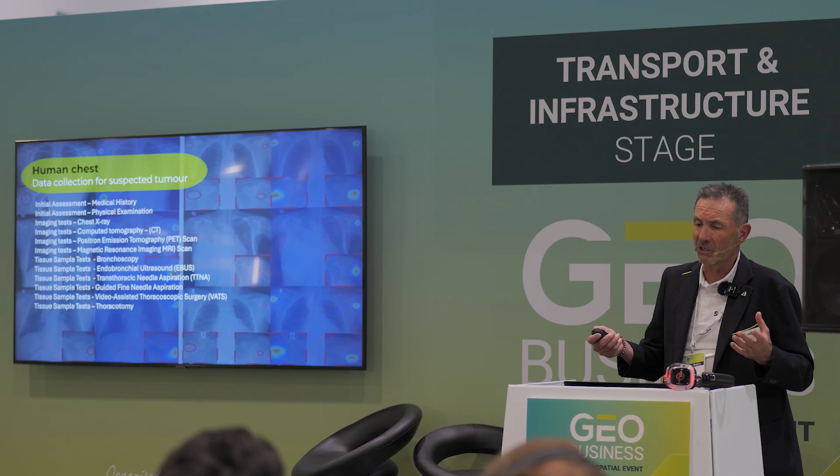The range of early assessment approaches they might take, the portfolio of imaging techniques they've got to hand, the ability they've got to take samples and conduct tests on those samples, and the ability to do laboratory tests, effectively in-situ tests and laboratory tests.

So there's a massive range of data that they may be looking at in order to diagnose a patient, to understand the nature or the extent of a problem, and to facilitate a remediation, a repair, a healing in their case.

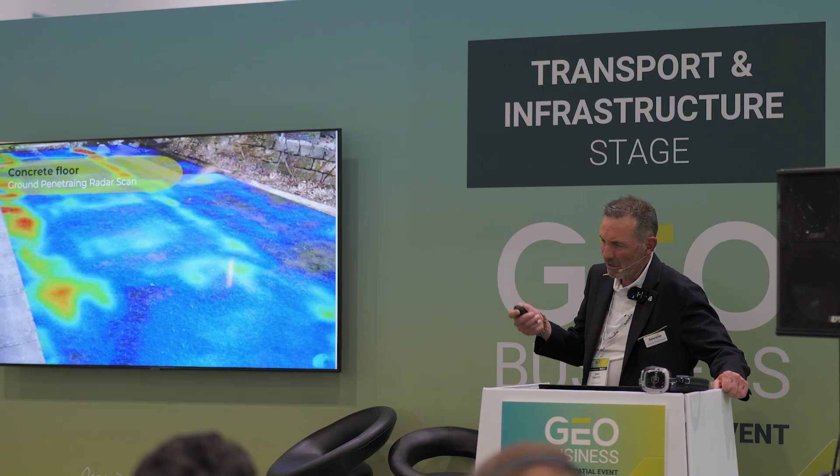Fortunately, I've never had reason to get that close to that area of science, but I have spent what seems to be quite a long career, a lifetime really, working in fields, gathering data about the condition of structures. For a long time, I was responsible for a structural investigation team.

I was director of a company involved in non-destructive testing. We would get asked frequently to look at a structure like a concrete floor, in this case. We might do a ground penetrating radar survey of it. But we'd also do a bunch of other things.

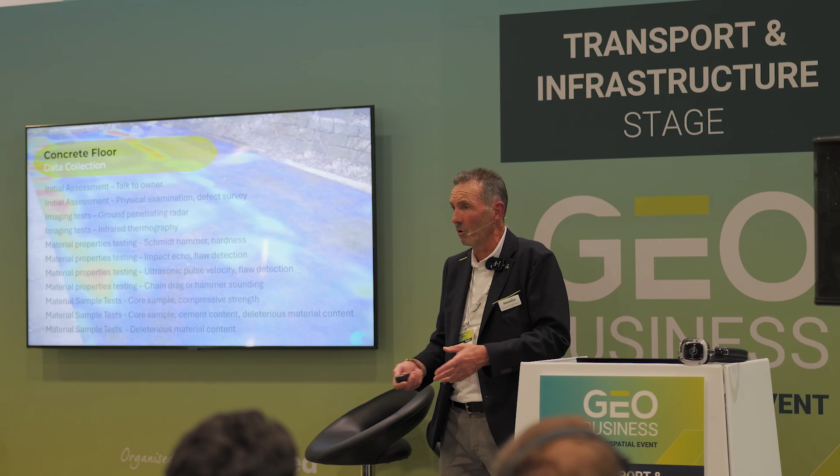We would ask what was the nature of the problem, and try to understand what anecdotal evidence was available. We would use a range of imaging techniques, take samples, look at material properties, both in situ and in a laboratory. We would always try to take a balanced view towards arriving at something affordable and practical, resulting in a report that would help the professional make a decision.

So I've moved on from that area. Five years ago, I joined Senceive, and I moved from a world where I was taking data from the here and now, from one position in space at one point in time, about the state of this floor here and now, to one where I'm much more involved with longer-term monitoring, providing longer-term insight into how a structure might be behaving.

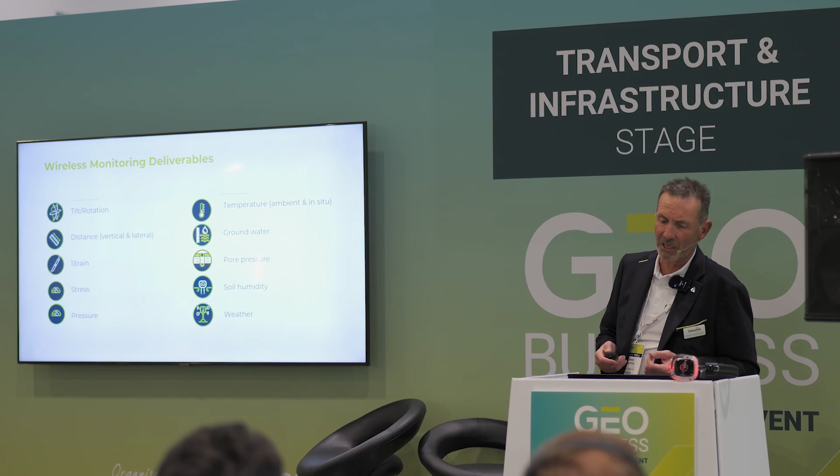I think a lot of those same principles apply. Again, there's a whole range of different parameters that we can gather, that we can choose from, and putting the right balance of those together as an expert in the field is very much the job of the professional monitoring specialist, I think. So I want to spend a little bit of time looking at some examples of how that comes together.

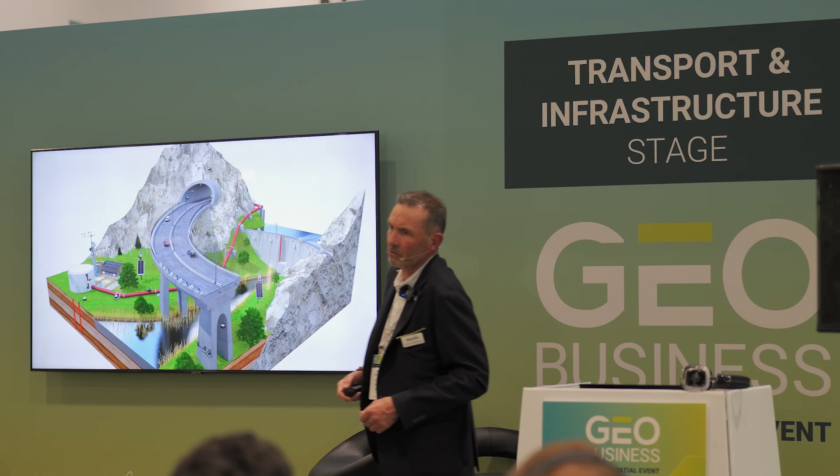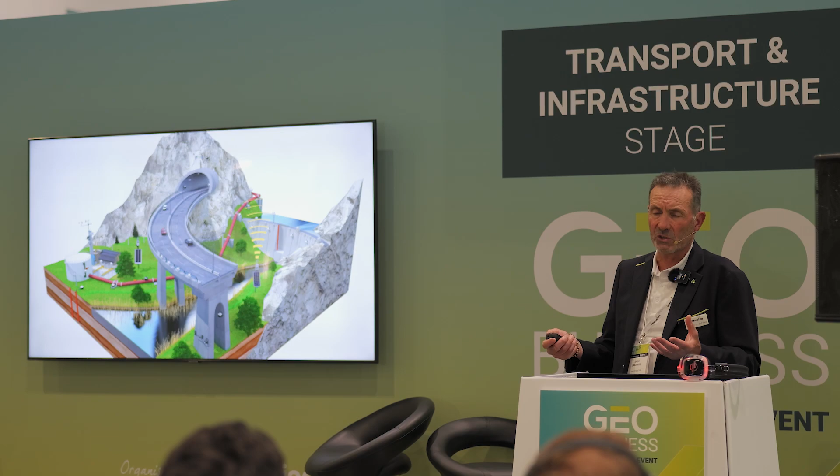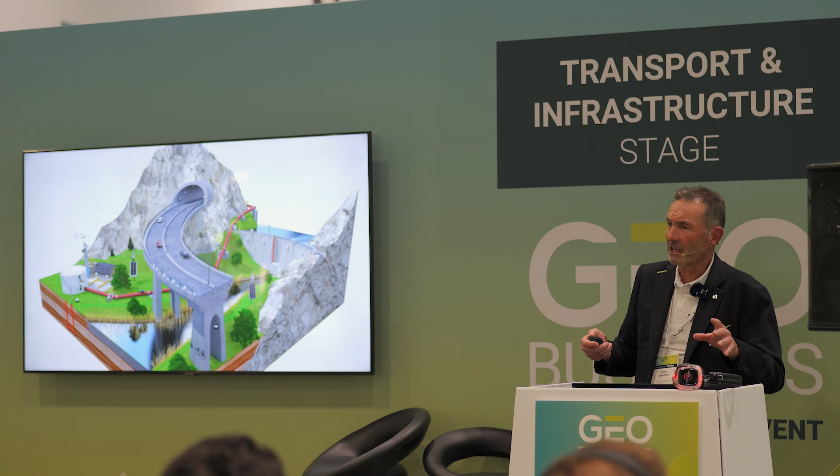All of these things forward data from the sensor to a cellular gateway, which relays that data to a cloud-based server, allowing you as a remote user to access it. They can send automated alerts if thresholds are breached and collect long, medium, or short-term data. A range of different sensors can be applied over these timeframes, collecting virtually continuous data on a virtually permanent basis from the structure.

In the limited time we've got today, I want to focus on a couple of areas. The first is an example of a structural monitoring project: a bridge in Dortmund, Germany, involving a multi-sensor monitoring approach to look at a structure that was highlighted to be of interest.

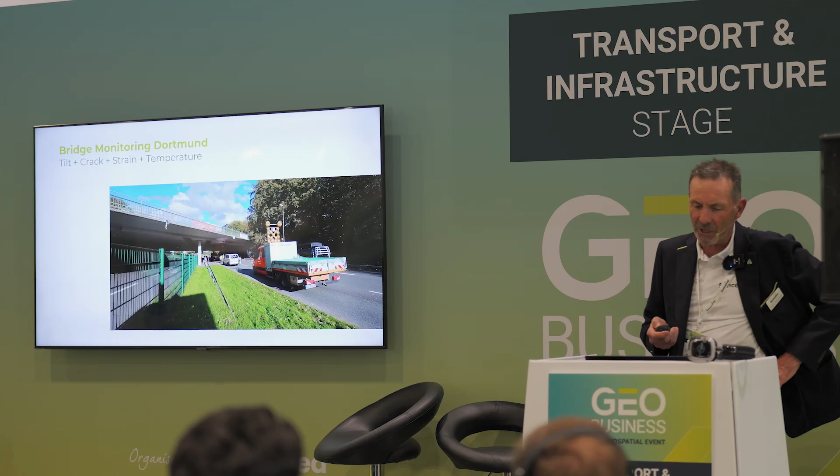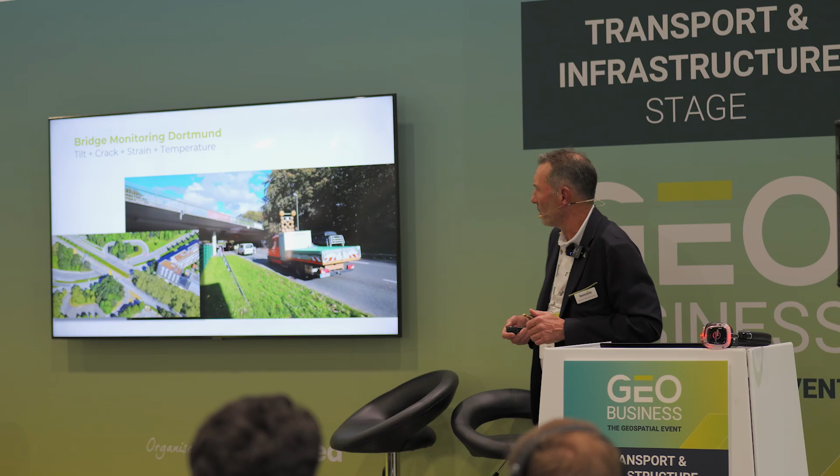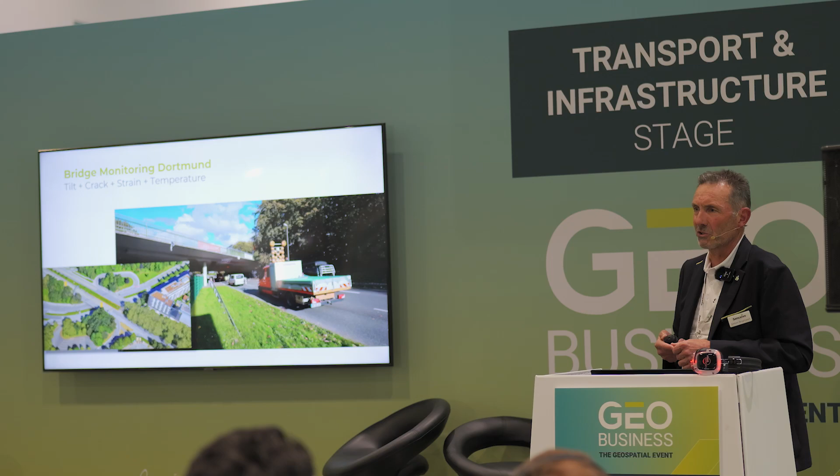This is probably not the most exciting bridge in Germany, or even in Dortmund, but it's quite important because it's a 6-lane bridge carrying an arterial road, effectively the inner city ring road in Dortmund, over another busy local road. It was built in 1957 and is a key part of the inner Dortmund road network. It's also quite close to Dortmund's football stadium, so a lot of people would be upset if it was out of service.

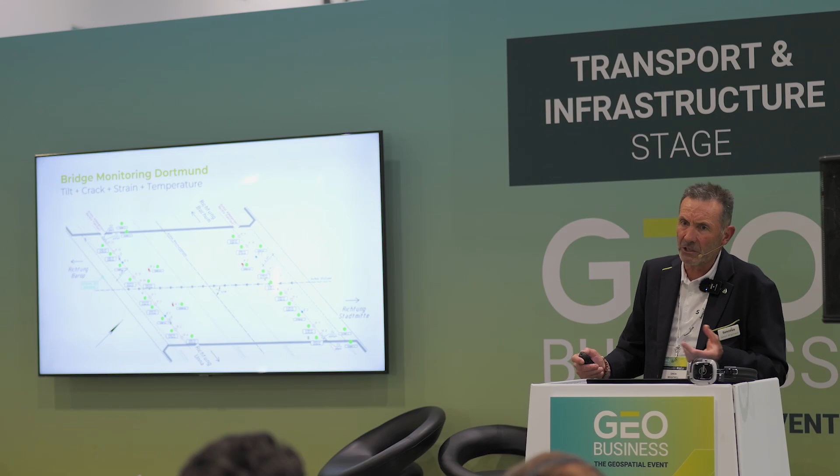A condition survey was carried out in 2022, showing evidence of surface cracking and distress. It's quite an old structure now, it's had a lot of use, it's exceeded its design life and is carrying excess loading - a familiar story across bridges worldwide. There was concern about a loss of pre-stressing in the concrete deck, and possible internal corrosion of the steel, potentially weakening the structure.

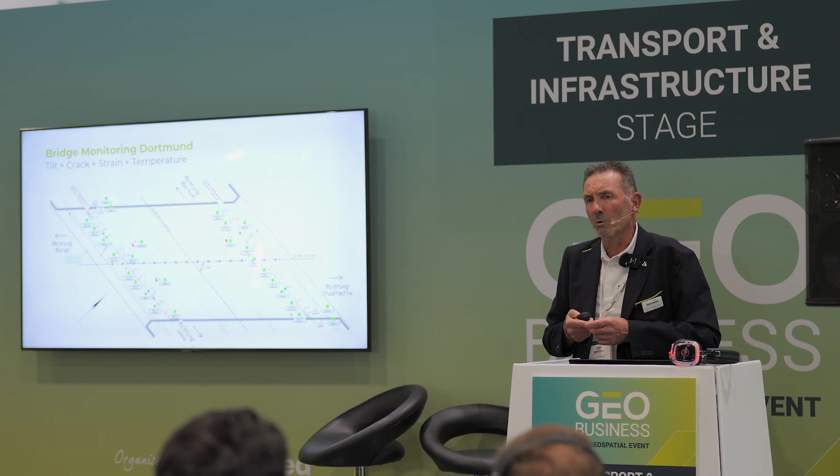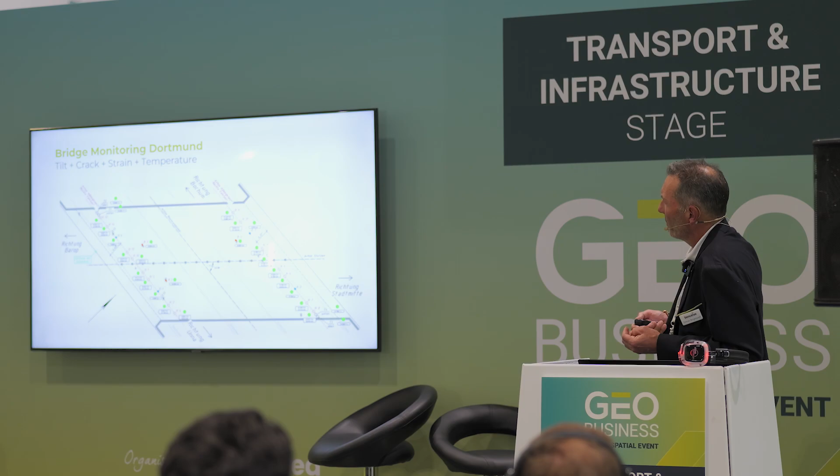The engineers responsible particularly wanted to know how the bridge behaved under load, how it was deflecting. A monitoring package was put together, starting with installing a series of tilt nodes on the deck soffit in two lines - lots of these were effectively stuck to the underneath of the bridge. If we move on, we can see that happening.

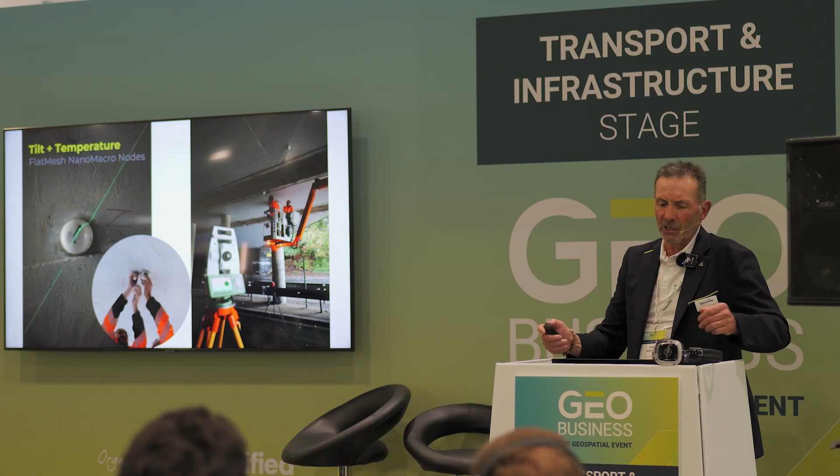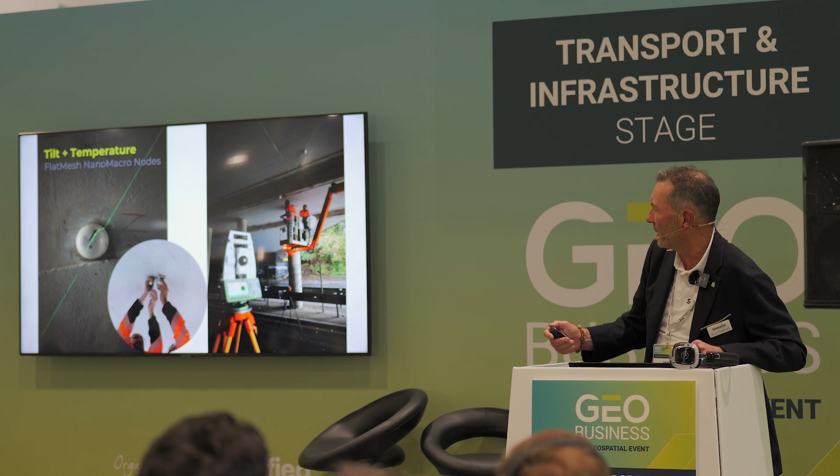These sensors, in this case, just drilled into the deck soffit, into the concrete. This is pretty simple stuff - it doesn't require a high degree of specialism and can be done quickly and simply, in this case just during a relatively short road closure with access to a hydraulic access platform.

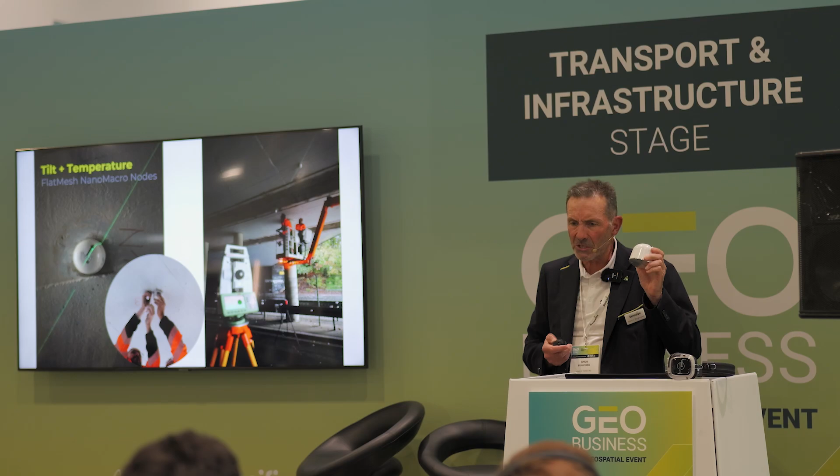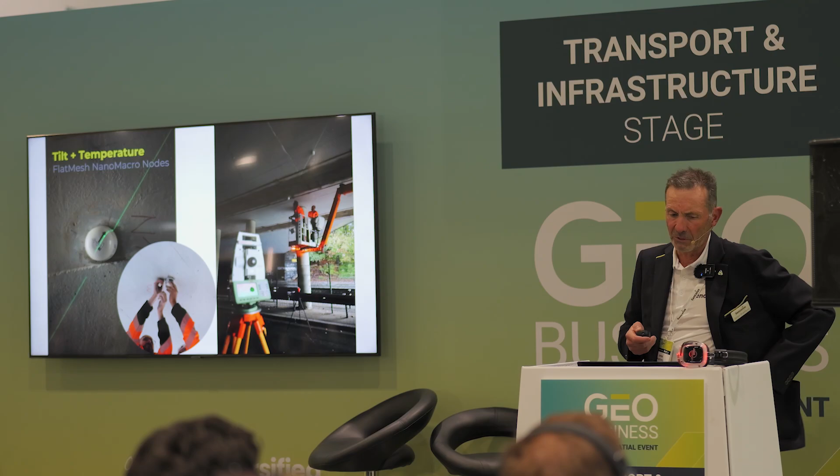These sensors do a range of different things. First, they measure rotation - they're triaxial tilt sensors, measuring rotation to within a thousandth of a degree, very precise measurements. They also measure temperature, so it's possible to understand effects like diurnal changes, whether sun hitting the bridge structure is having an effect, allowing temperature compensation on the data. They communicate in a mesh network via a gateway so you can see the data without visiting site.

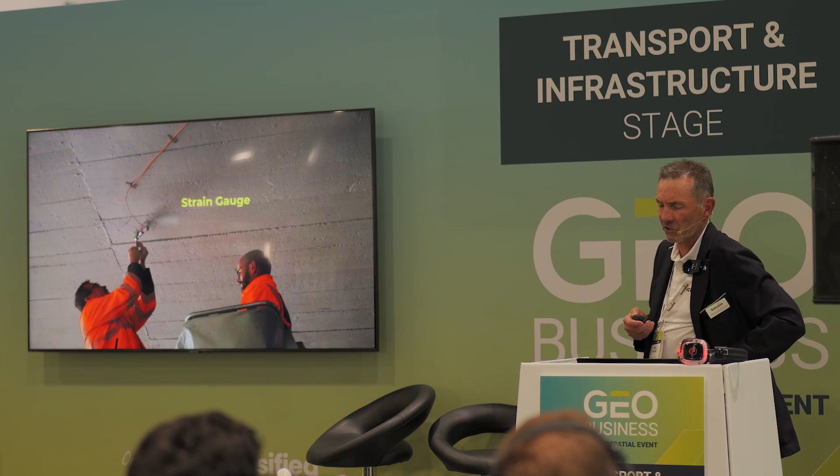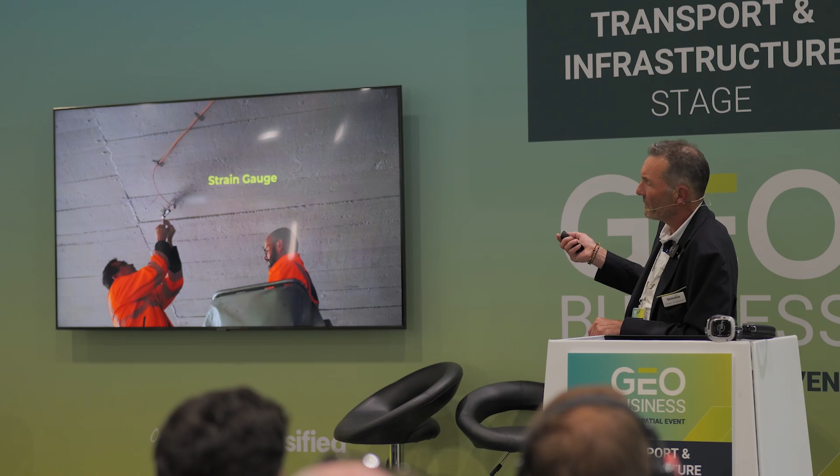A number of other sensors were installed within the same wireless network, all harvesting data to remote users in the same way. At mid-span on both sides of the deck, strain gauges were installed so the effective loading could be assessed. Where there were cracks on the deck, crack sensors were installed, enabling us to look over time - a day, a week, a year - at how those cracks were changing in extent.

Those sensors were all installed at the start of a 6-month monitoring program. They were installed and left sampling at 30-minute intervals for six months to build up a baseline data set. After that period, there was another road closure and another batch of data was collected, including using laser scanners to look at the behavior of the bridge structure.

The reason that was done at that stage was exciting - our friends at Dortmund Council pulled some strings and got the fire brigade to lend them the biggest truck they could find, a 48-ton crane, which could be used to provide this dynamic load on top of the bridge deck.

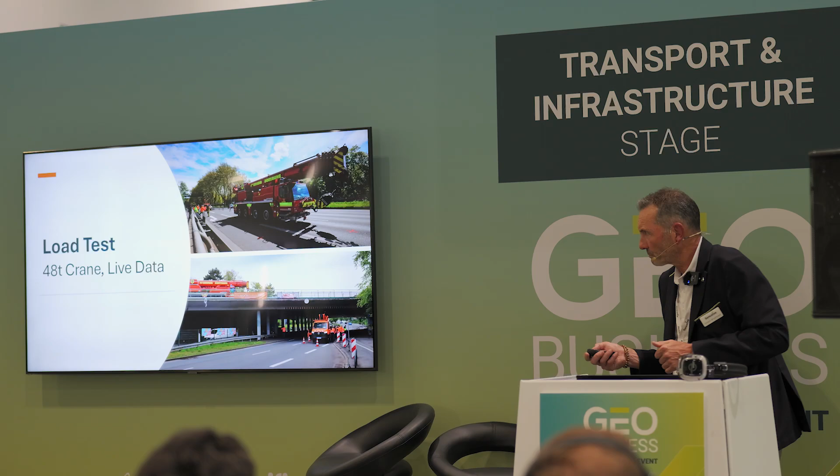There's a bunch of people underneath the bridge looking at the effect of moving that truck in various positions across the width and span of the bridge deck.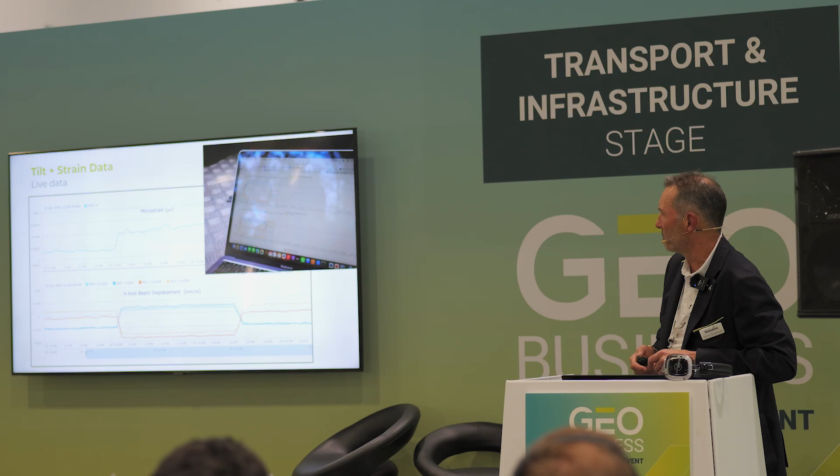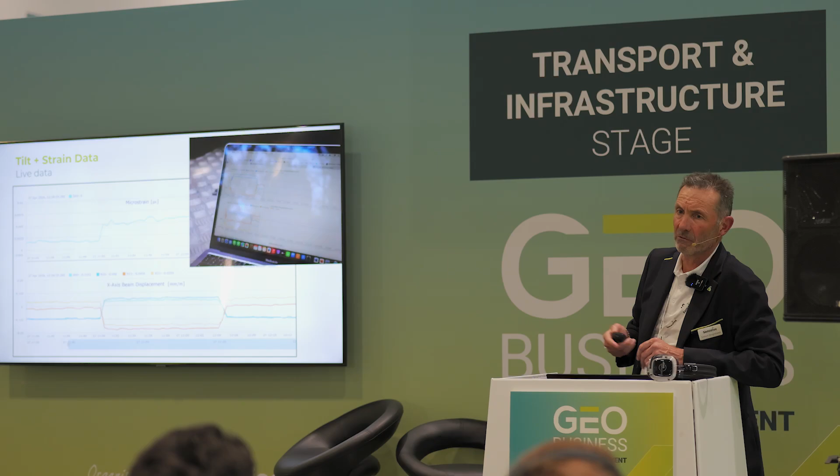Instead of collecting data at 30-minute samples, the wireless system was set to record live data at 30-second periods. That data could be seen in real time on a laptop - you could see as the truck was moved, the effect on the strain data and the displacement data from the tilt nodes.

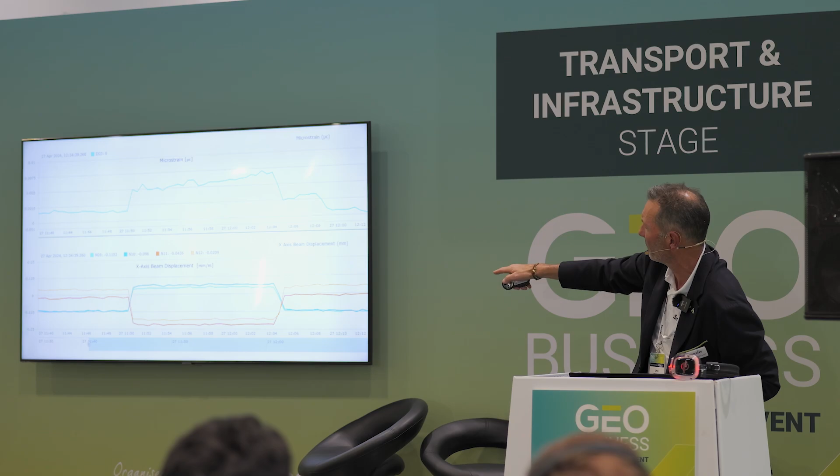If we look at that in more detail, we can see this data quite clearly. On the x-axis you're looking at time, a period of about 30 minutes from 11:40 through to 12:12. The top graph is microstrain, showing the effect of the loading. The bottom shows the displacement in millimeters of the deck from the tilt nodes.

It's pretty clear at which point the truck was rolled onto the deck - very easy to see when it went on, the effect of it, and when it rolled off.

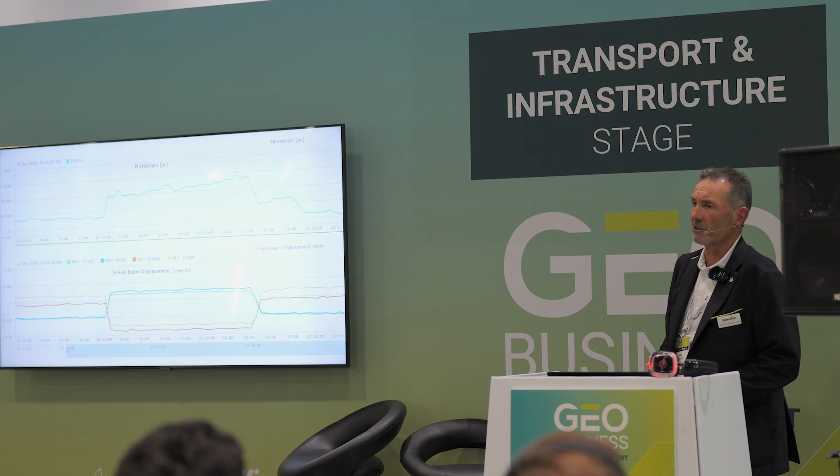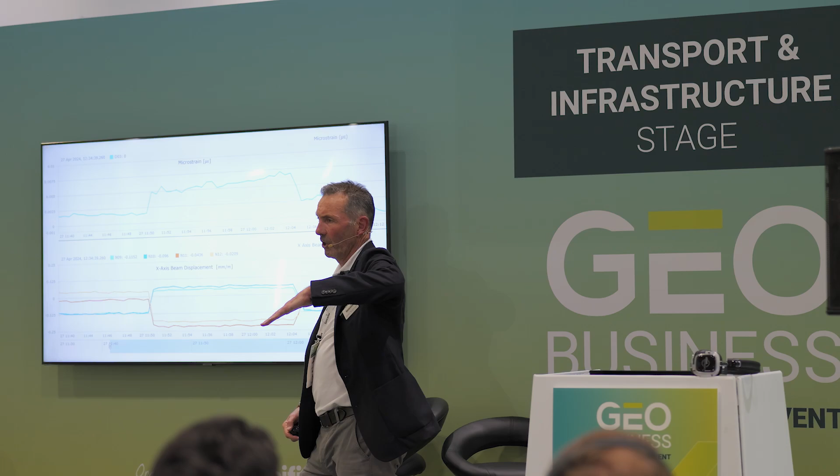The reason for the particular shape of this graph is that these two lines, the two orangey-yellow ones, are one side of the load, and the two blue ones are the opposite side of the truck. So one set are leaning in towards the load, and the other ones further down the bridge are leaning the opposite direction towards it. They're both moving to the same degree of magnitude - the loading effect is the same, but one's leaning this way and the others are leaning that way.

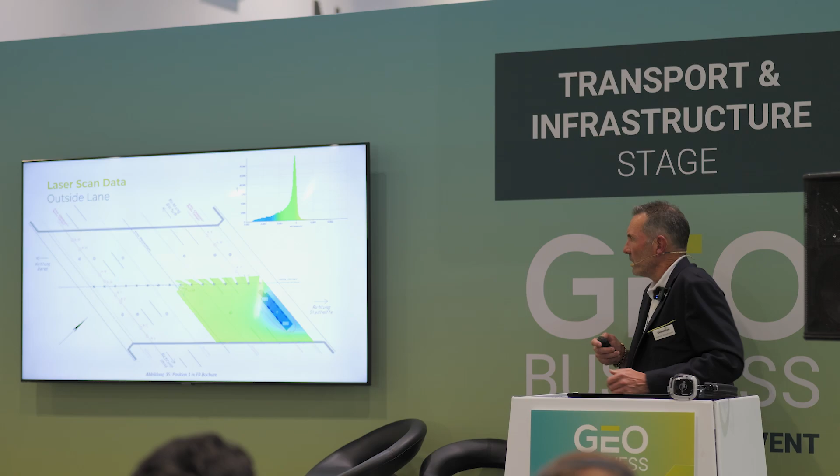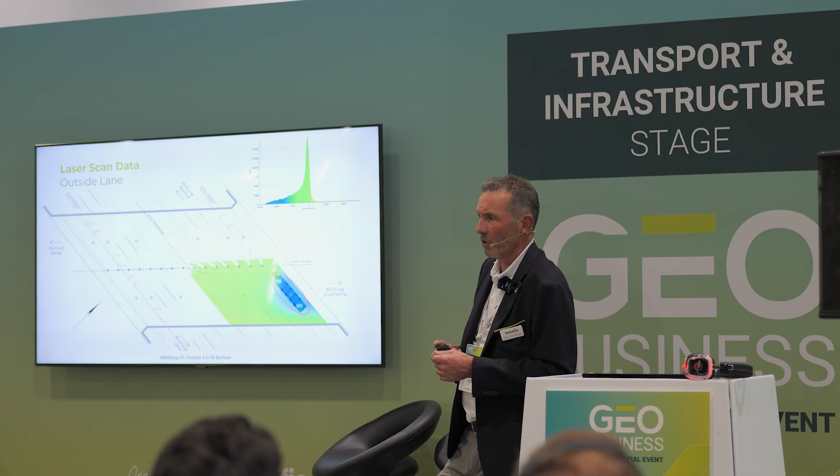At the same time as the wireless system was collecting data, the laser scanning system was collecting millions of points, building up a surface terrain model of the bridge soffit. From that, you certainly don't get any prizes picking out where the truck is located in this plot, the darker blue indicating the greater deflections.

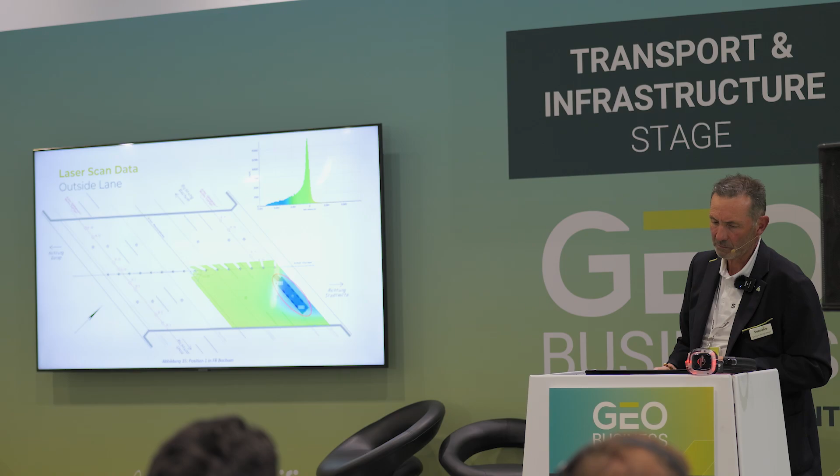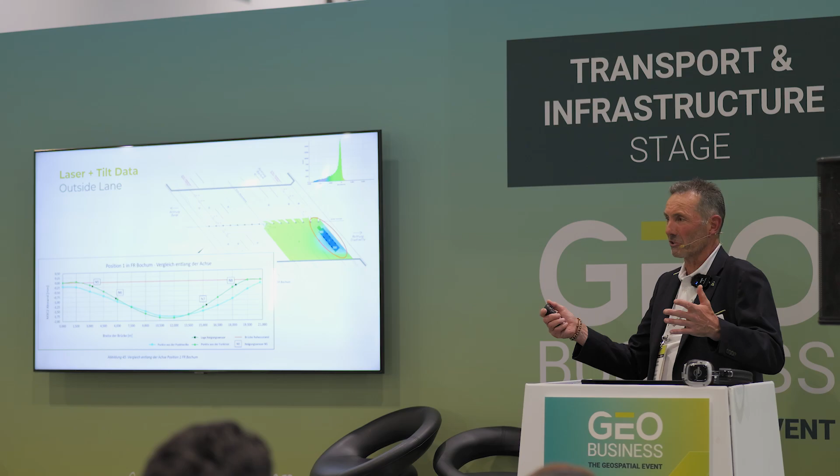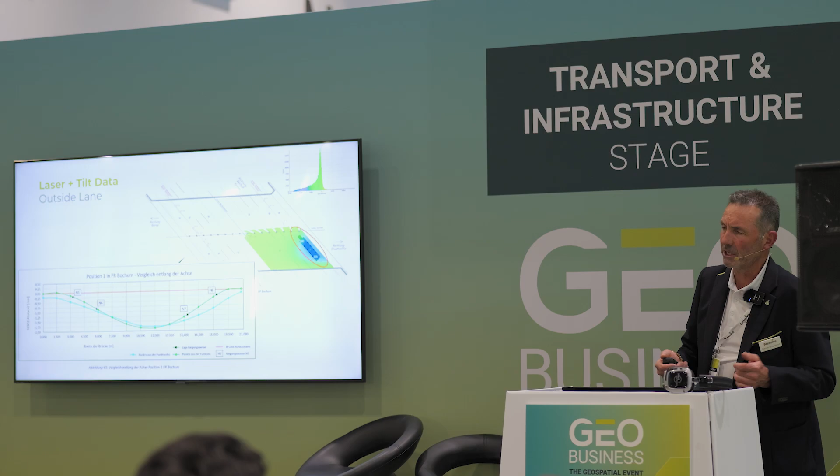Putting those two data sets together in this graph, you can see the tilt data displayed in green, and the laser data on the blue line here. Again, there's a high degree of correlation. For the cynics in the room who would say you have to do a laser scan survey to get the level of precision - actually the precision is virtually the same, within a quarter of a millimeter for both data sets. So there's a high degree of corroboration between those two independently collected sets of data.

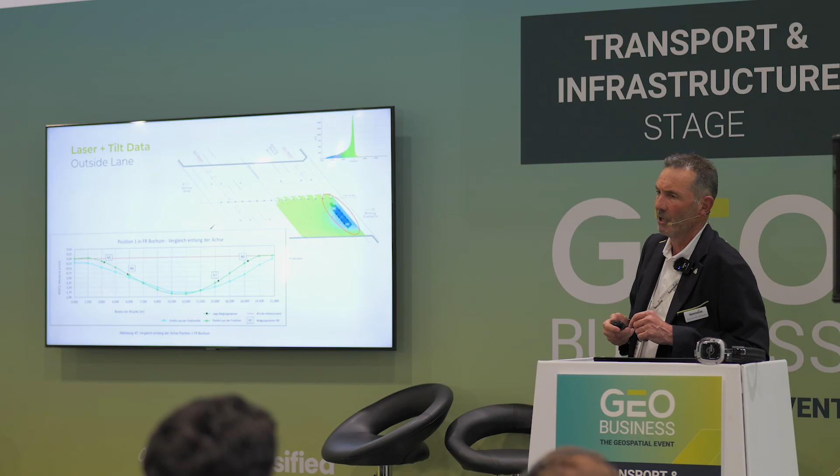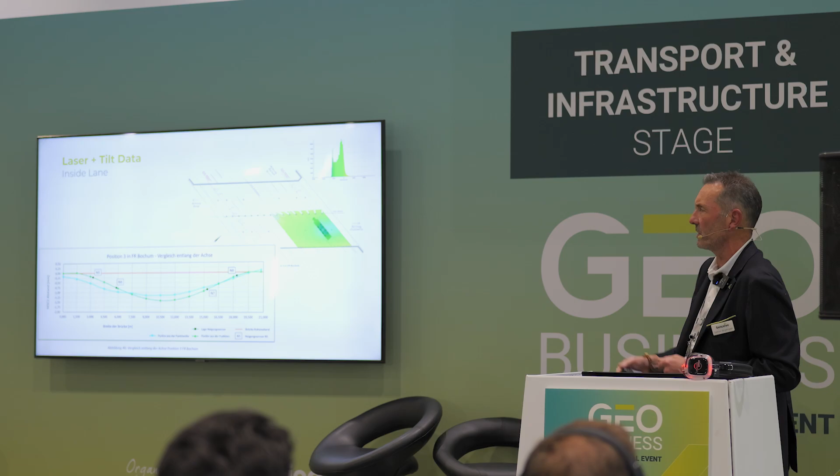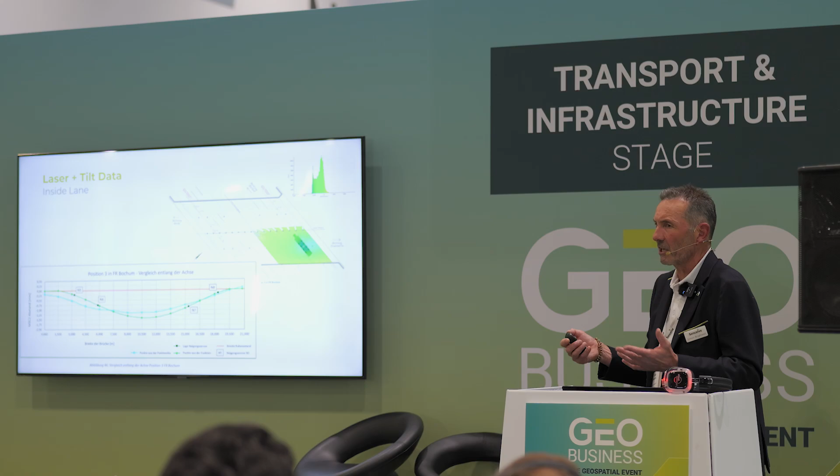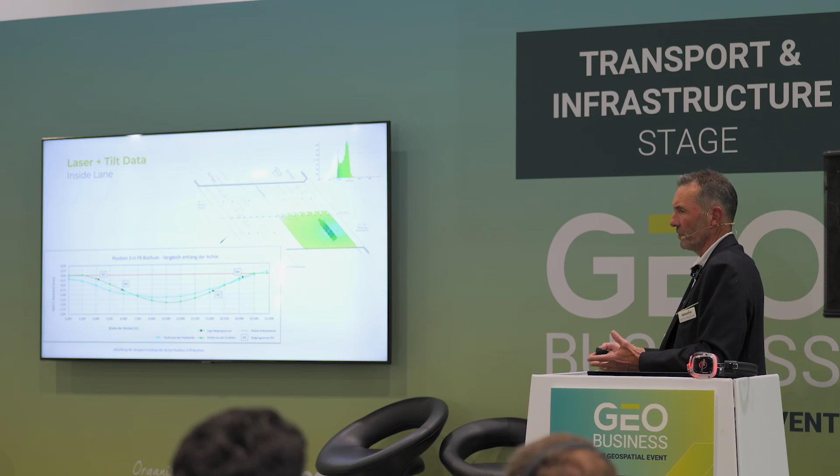I think what that project showed us was that you can bring together a bunch of different sensors that collect mechanical data, for example strain, with effectively movement data in the form of displacement. They can tell a consistent story, explaining the distribution of movement and how that pattern of loading affects the structure.

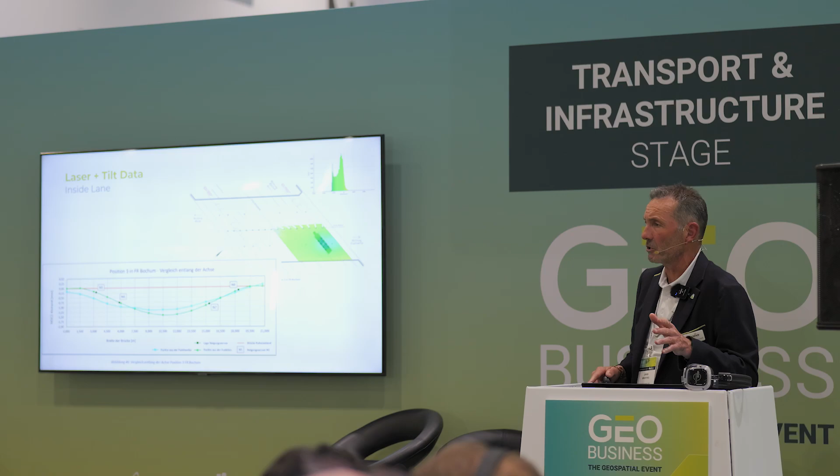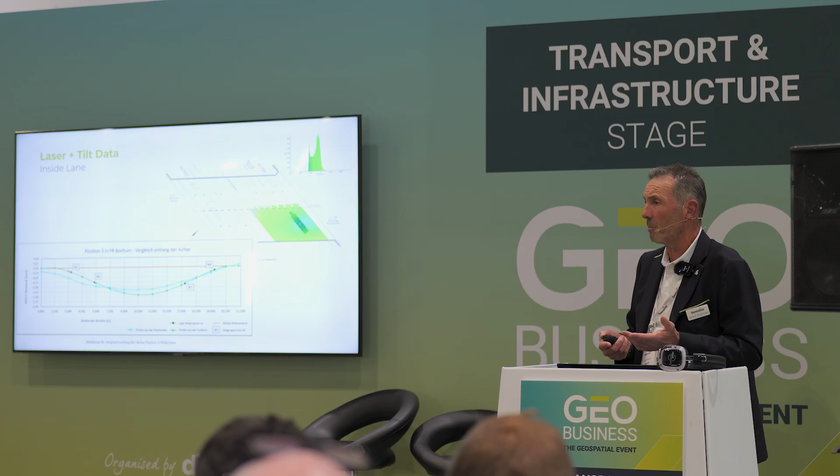And you can see how that changes over time. The laser scan, of course, gets a complete, very precise picture across the entire structure, but only at that time and place - it needed a road closure, it needed line of sight. It's something you do occasionally, maybe every few years. The tilt sensors could remain in situ for 10 years before they need a battery change, so they provide near continuous data on a near permanent basis. I think it's that sort of combination that is quite powerful.

The next example I have is around a different area altogether. A lot of what our users employ these kinds of approaches for is looking at slope stability and the risk of landslides, particularly affecting railways. Last year I presented on how Network Rail conducted an industrial scale rollout of wireless monitoring, employing more than 50,000 tilt sensors and 1,000 cameras, taking something like 6 million photographic images triggered by movement of the ground. They've used this system on a big scale to look at landslide risk and get early warning. I want to look at a couple of multi-sensor options in more specialist areas: the first is drainage, and the second relates to detection of rockfall events. They're still involved with slopes, but a little more specialist.

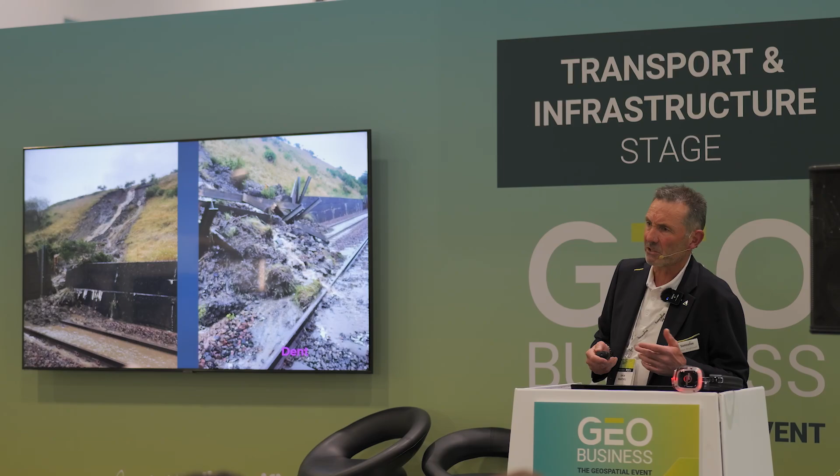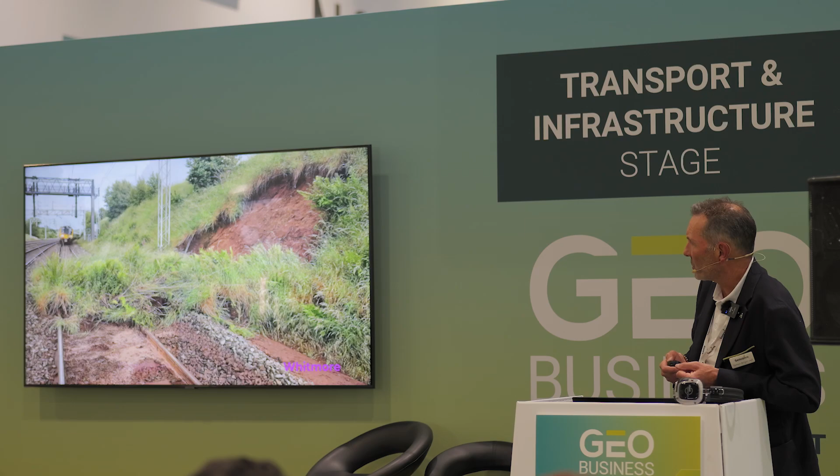So the first one is around drainage and flood monitoring. The effects of water on slopes is very significant. Wet ground means reduced friction and increased loading on a slope, so you're looking at an increased risk of unfortunate events which cause damage, danger, and disruption to the railway network. These events are quite common even when they don't result in an actual slope failure. Even floodwater on the surface like this can cause interference and disruption to signaling, communications, and electrification, stopping the railway performing effectively and safely.

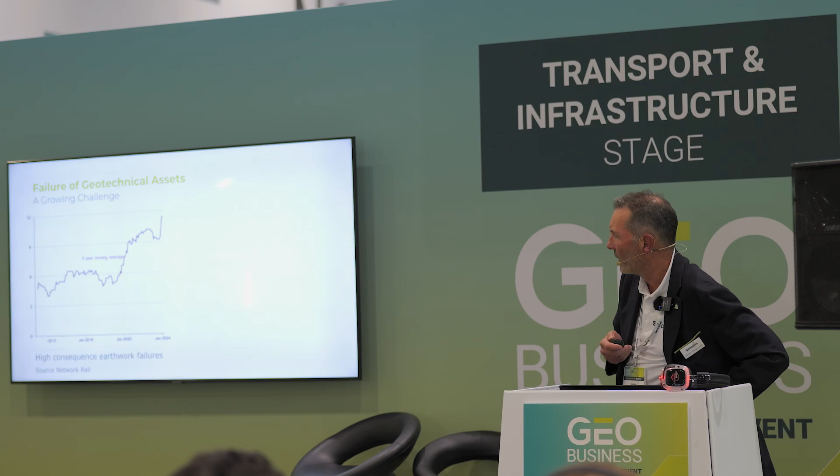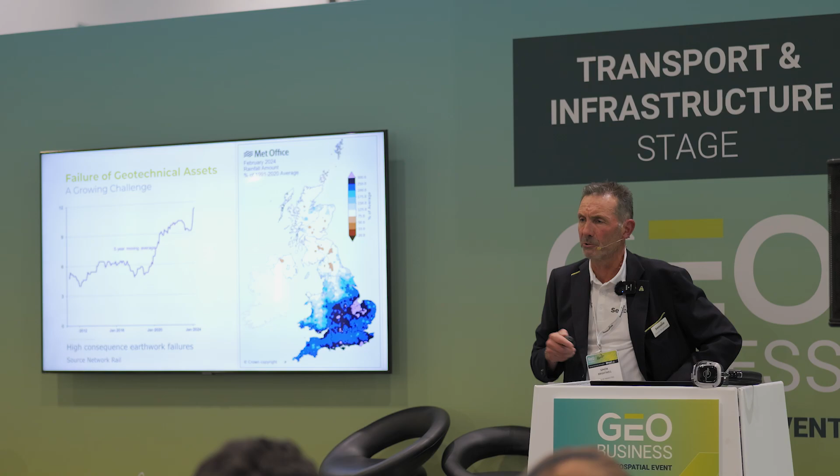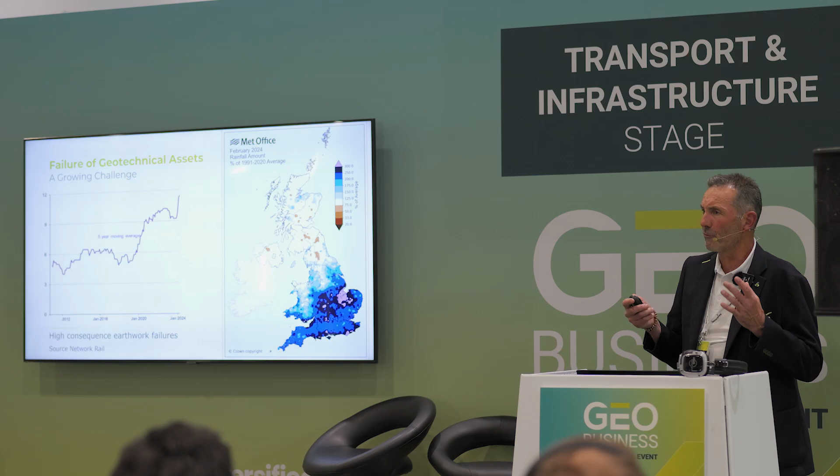Unfortunately, these problems are becoming more common—they're on the increase. The number of high consequence earthwork failures in the last decade has virtually doubled, and the reason is that our winters are warmer and wetter. That's a picture from last February, the result of a very wet period of weather. The part of the country I'm from had three times as much rainfall as normal last winter and the previous year. So we may have just had a dry spring, but the last two years were extremely wet, resulting in a very high number of failures.

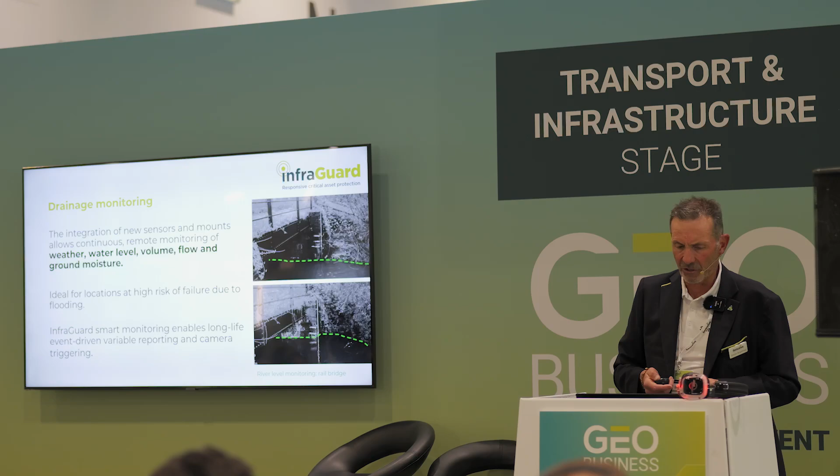So we were tasked with coming up with some sort of cunning plan to help reduce and mitigate that risk. We took a number of different sensors and ways of mounting and operating them and put them together into a package that looks a bit like this.

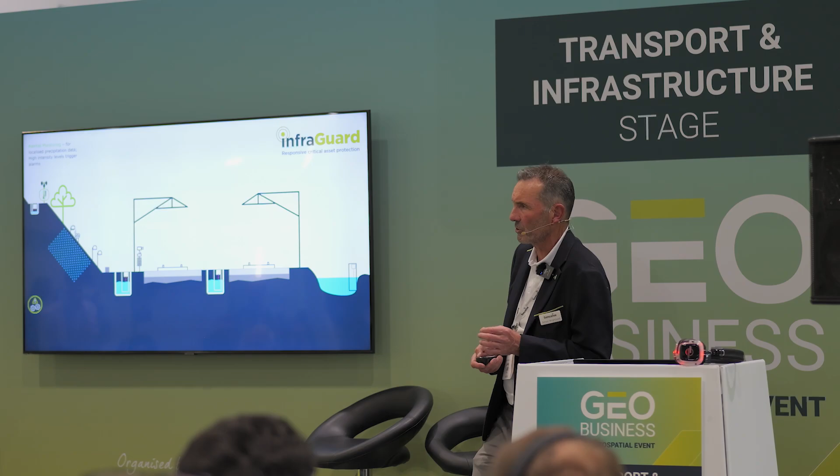If you take the example of a railway structure here, in the top left corner, we can bring a weather station to site and hook it into our wireless network so you have automated alerts and continuous monitoring without having to visit the site—very localized data on precipitation. You can include soil moisture monitoring within that package so you have a good understanding of what's happening near the surface in terms of moisture. Tilt sensors can tell you whether that near surface ground layer is moving.

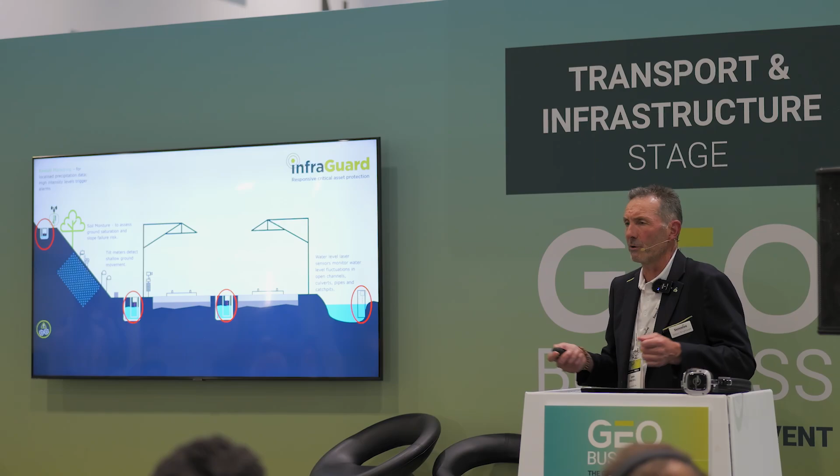And water level sensors, which typically take the form of a laser displacement sensor mounted at the top of a tube with a float in the bottom, measure the distance between the float and the sensor. As the water level rises, the float moves up and down. This can be done in many different environments—in open channels, in pipes and drains, and in culverts.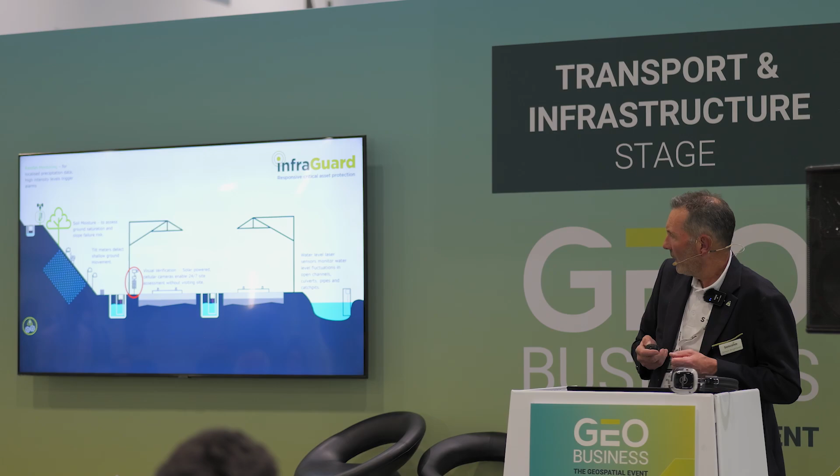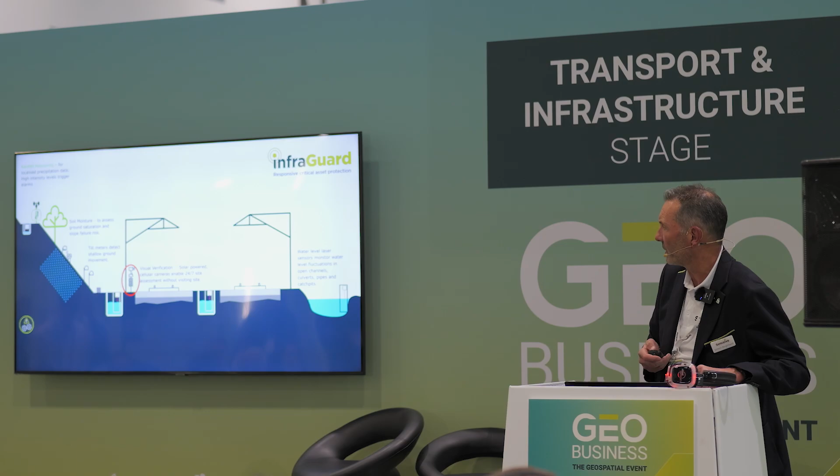And then a camera which can provide imagery of the site any time of day and night, in most weather conditions—an autonomously solar-powered camera that can collect high quality images, which can be triggered by other parts of the system, by movement, for example. So that comes with all the advantages of a responsive wireless system: automated alerts, multiple levels of alert, and dynamic sampling—waking up from a low power mode to a rapid sampling mode—to provide quite a complete picture of the effect of high rainfall on a vulnerable asset like a piece of railway.

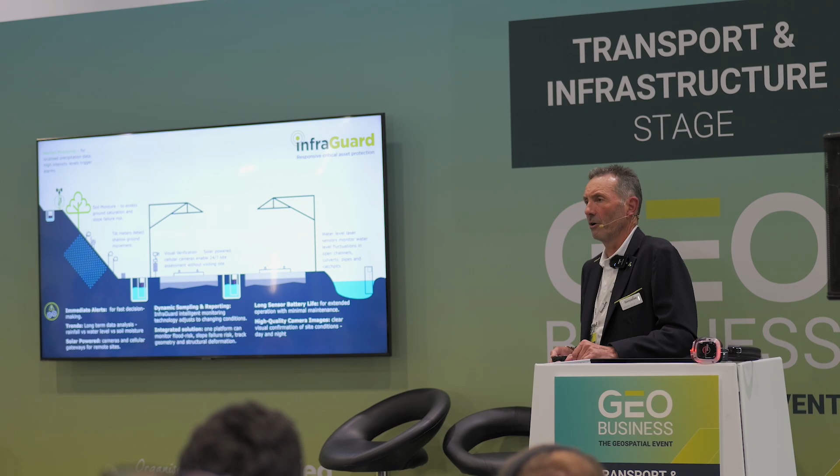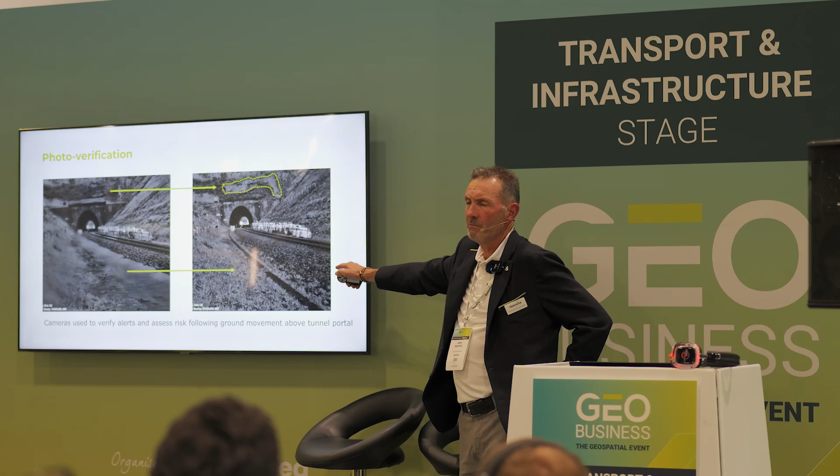So just to give an indication of the value of these cameras as part of the system. This is a site in southwest England, and this picture was taken just before 5 o'clock on a Monday afternoon. You can see there's a build-up of water. This picture is taken at 3 a.m. on the Tuesday morning, the next day.

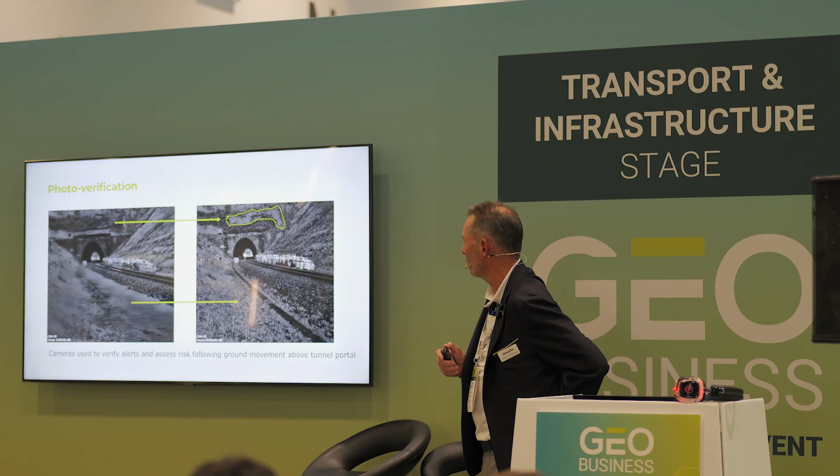The light compensation isn't done with a flash, it's just done with the software in the system to take that picture on a long exposure with light compensation. The water has pretty much soaked away, but significantly, there's the scar here where a whole load of that slope has given way, and a lot of sandy, loose material has fallen down the side and come down next to the track. Fortunately, in this case, it was mostly contained by this temporary wall here.

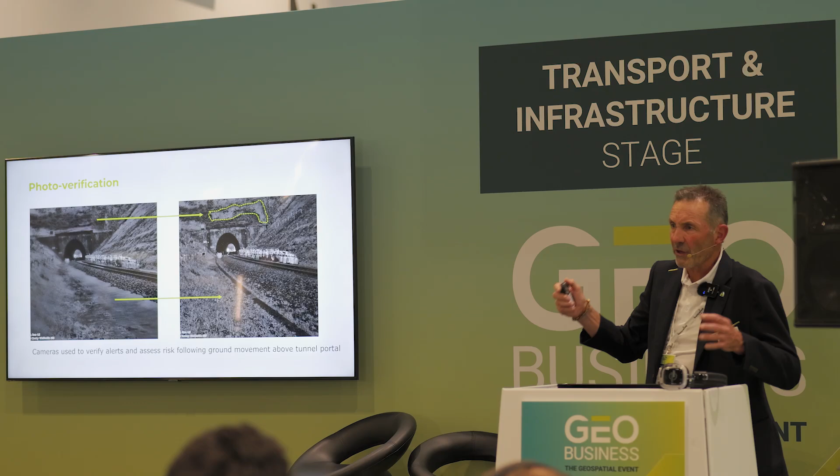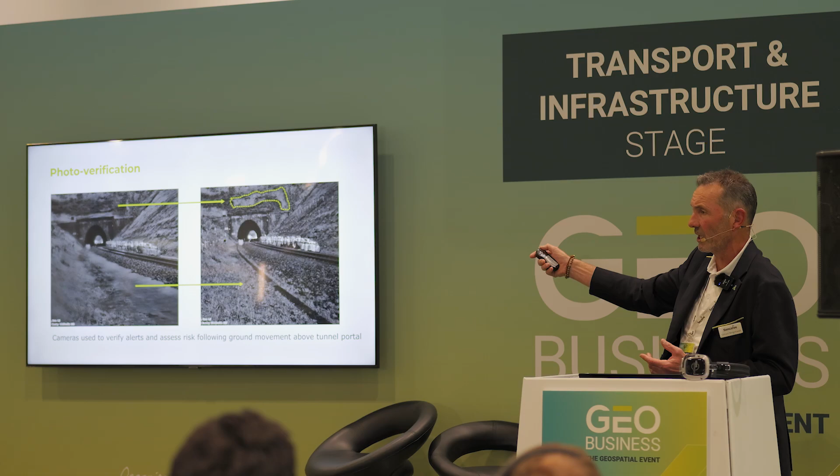So that happens automatically. That picture was taken because the tilt nodes had detected movement. It's a smart system, so at 3 o'clock in the morning, you do not need an engineer out on site. You're getting an alert to your team, potentially signaled through to the signal box, to the control, about that situation.

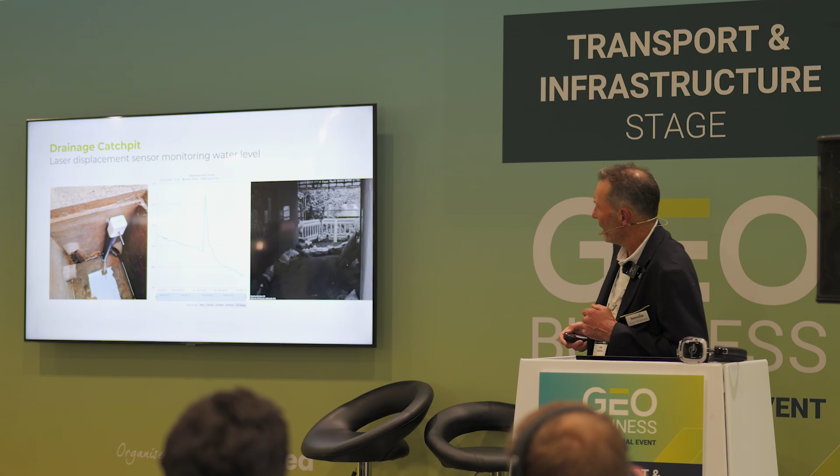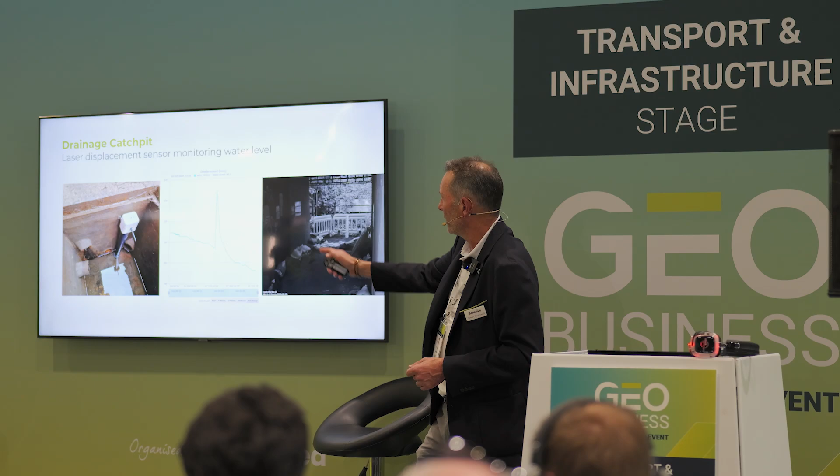Again, use of the camera. In this case, you've got the water level meter. This is a site near a substation that was prone to flooding. Within this catch pit, we've got a water level meter, and you can see the effect of a sudden downpour of rain. If there was a pipe blockage in there, a gradual build-up, you'd see that within that remote system. And the cellular system can work there, even with the cap over the catch pit, and a camera can be incorporated as well.

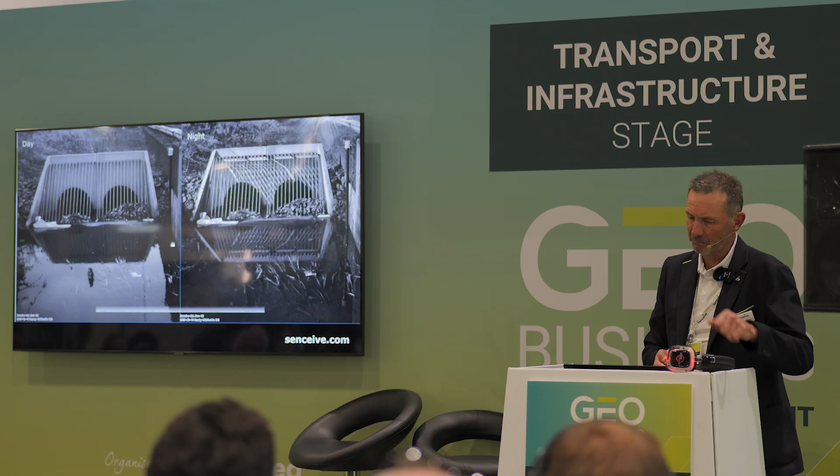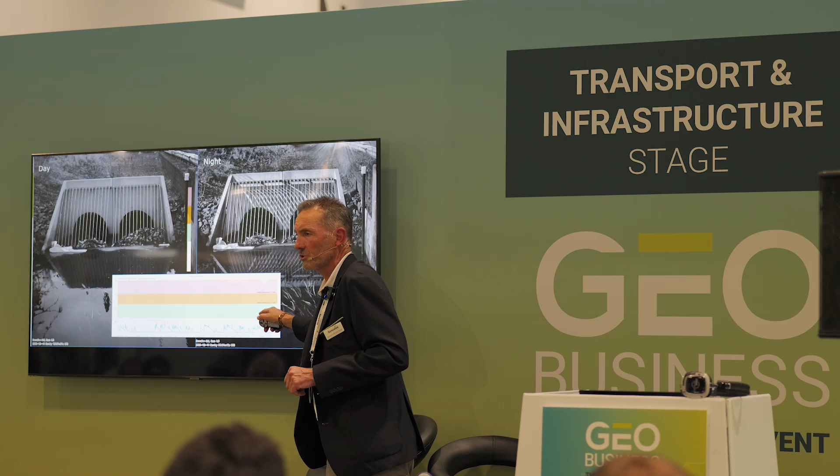So it's a joined-up system that allows responsive monitoring with multiple levels of alert. As that sensor picks up water level movement at different levels, you can set it - it's your choice what is a significant level of increase in water level. You can get a green alert that will just go through to your database and doesn't wake anybody up. A red alert sends bells and whistles going everywhere, and the whole team are told to get out of bed and get to site.

So that's drainage. Finally, I just wanted to highlight another area where I think it's beneficial to bring together multiple sensors, and I've got a video to finish off with here around this area of rockfall monitoring. This is maybe not such a huge problem in the UK as it is in some other parts of the world - particularly our clients in Europe and in the Alps are very interested in this.

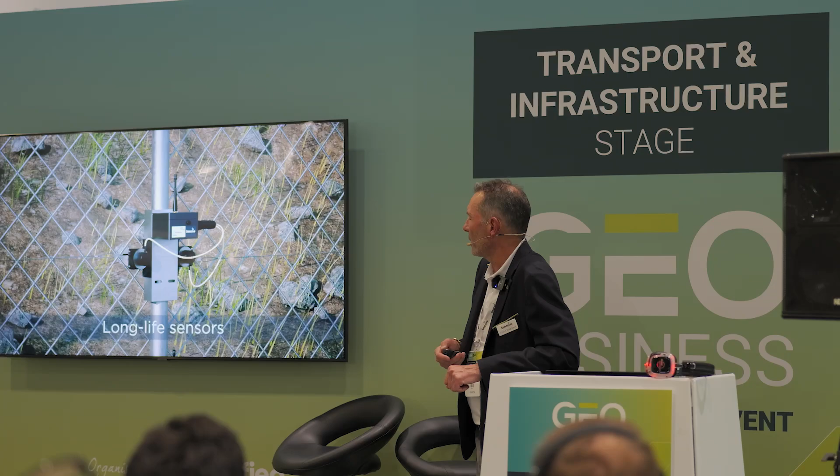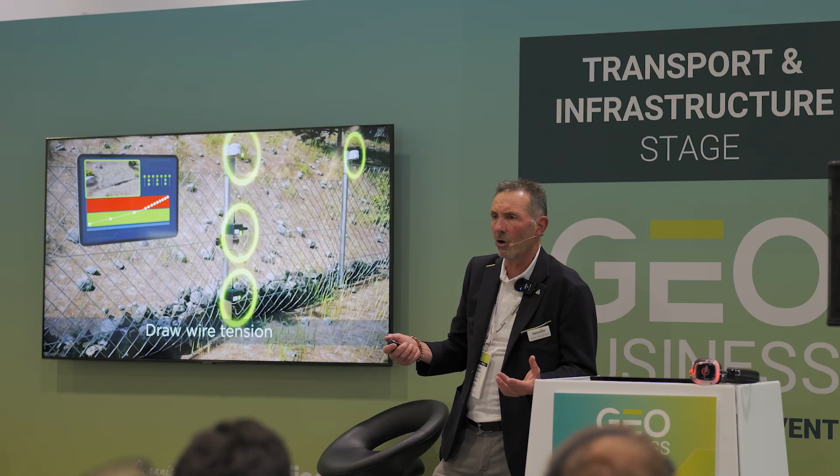So this involves a number of different sensor types. We can have draw wires with gauges monitoring the tension on those wires - this will pick up detection of a gradual accumulation of debris on a catch fence. We can fit tilt nodes to those stakes to pick up rotation if the whole fence is moving, and even when there's a glancing blow, an accelerometer within those tilt nodes will pick that up. If there's a sudden spike, it will wake up from its low power mode and collect that response.

In any situation, it can trigger the camera to get a picture, to send that data, to send you a picture of the site, so you can understand an event has happened. Has the catch fence caught it and kept it away from my road or my railway or my pipeline, or my other vulnerable asset? Or has it left a rock sitting in front of the morning express train? So I think it's that sort of combination - multiple sensors combined with cameras - that can provide that powerful package.

So that pretty much brings me to where I was aiming to be - gone over a little bit there. I'll go back to the beginning, really, because I think if you consider the parallel with the medical world, you wouldn't expect your doctor, your medical profession, to make an important diagnosis on the basis of your blood test or your blood pressure alone. You'd expect a package of investigation, and I think the same should apply when we're considering critical assets like bridges, dams, and railways.